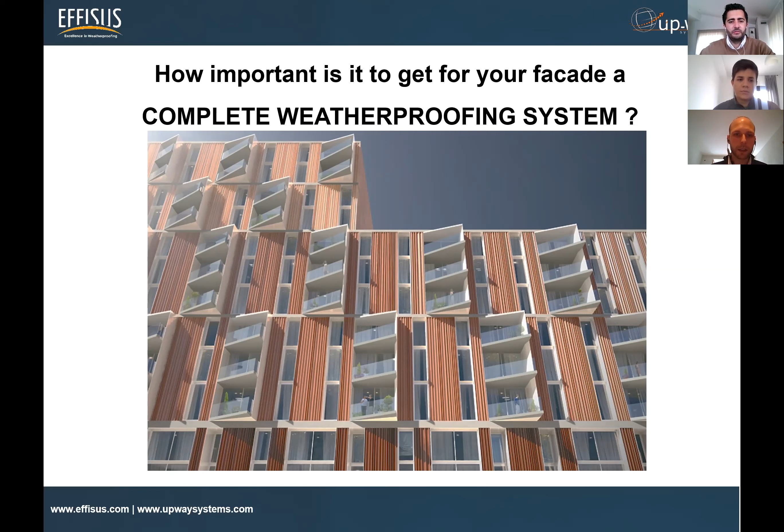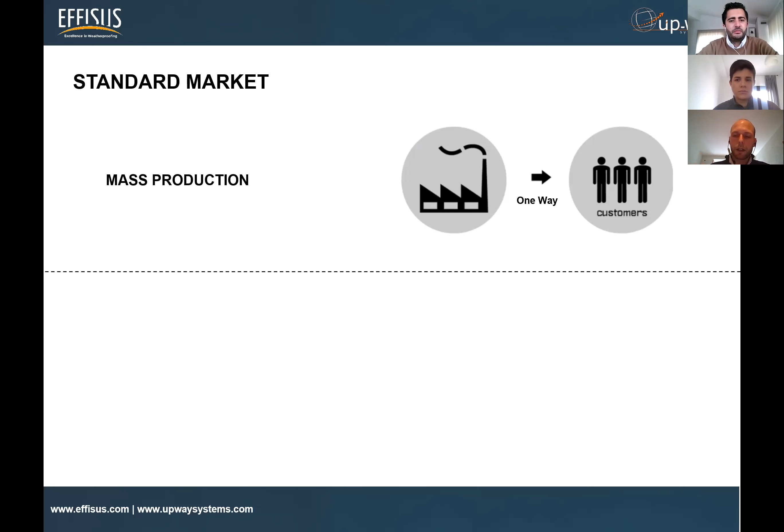Just for you to understand how we approach the market at Effisus. This is what we call a standard market approach: the customers let the factory know what they need, and the factory just produces according to those requirements, in a one-way dialogue. We understand that the best way to achieve a solution adapted to the needs is to make this interactive, so it's not only getting information from one side, it's exchanging this information between all the parties involved.

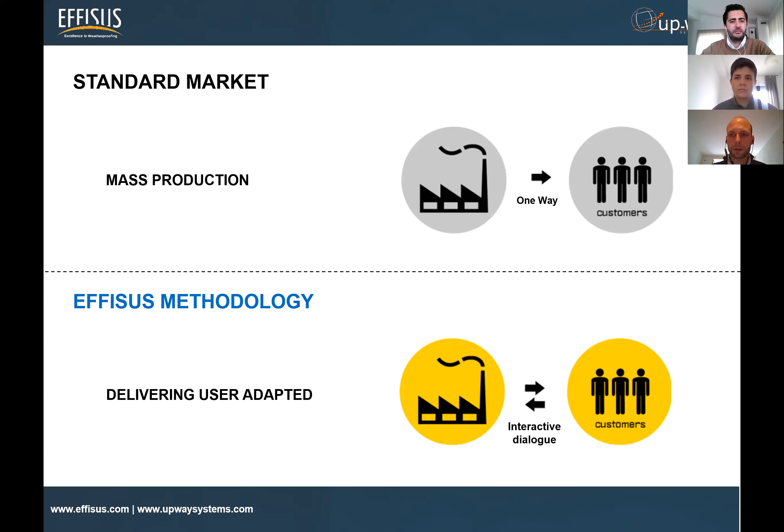So we receive information, but we also discuss it with the client, and that's why we have this approach very close to the client, with meetings at the office, etc. So to close this overview about the company, we have this interactive behavior. We are in contact with several players in the facade industry: facade contractors, consultants, architects, insurance companies, all the players that we believe influence the market, and we are glad to be part of that.

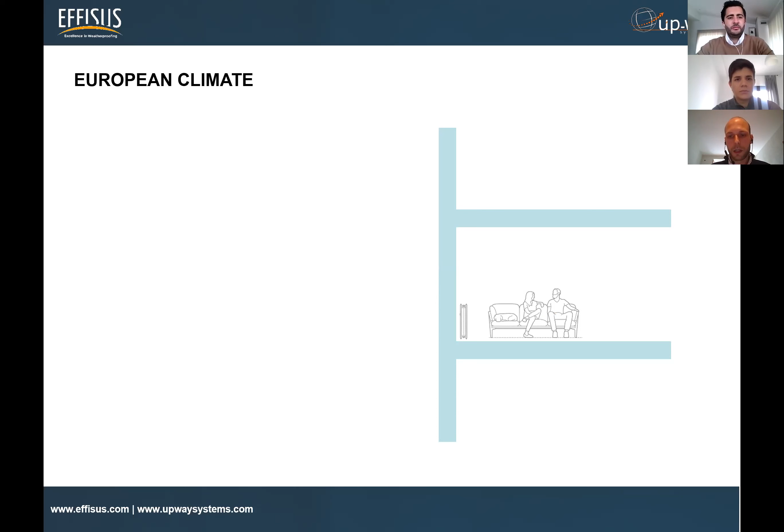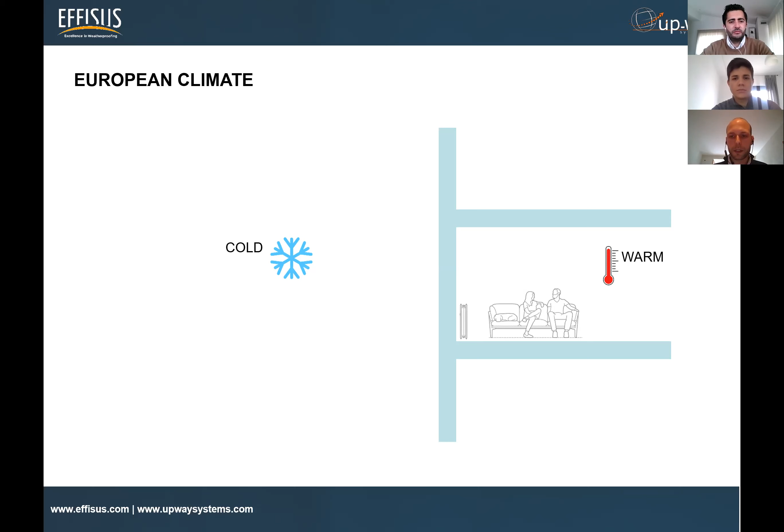So just as background for this presentation, I'll be focusing on the European climate, because when we are designing a facade there are several things we need to take into account, but of course we are able to design and study for every climate. So what do we have in the European climate? Normally cold outside and warm inside. We heat the inside and we transpire, etc. We also have rain on the outside that we need to keep outside the facade.

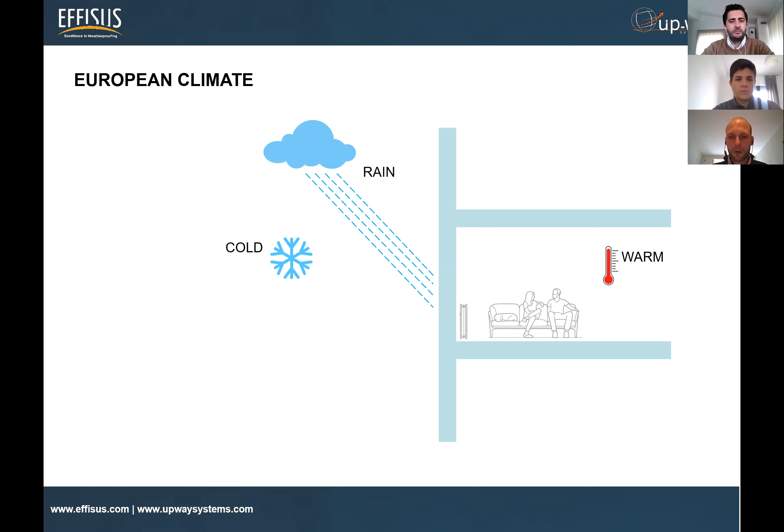It cannot be ventilated, so it will create mold and other issues that will compromise the thermal insulation behavior. You know that wet thermal insulation is not insulation that performs well. So we really can't have it like this.

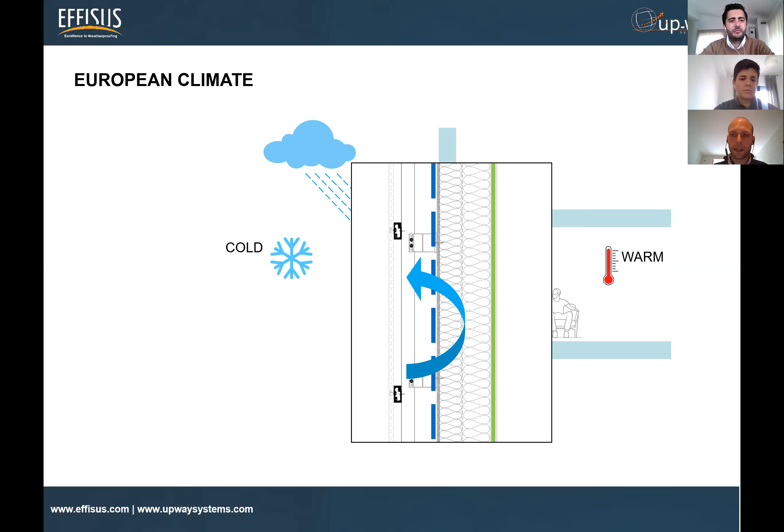Here we have some examples of, I would say, extremely common faults, common problems. Miguel, if you don't mind, I would like to ask you to comment on a few pictures here. I have two slides to show.

Sure, Enric, thank you. Basically, we are so close to the clients, and we see a lot at site - we see a lot of problems. When this facade composition is not well designed, or it's not well applied at site, we see problems. In general, the membranes are quite okay - in the UK market, in Europe, membranes have been applied for the last 20 years - but we see problems.

We see problems on details, on design faults. There are a lot of issues because it's not only a membrane - it's a membrane with accessories, with a lot of substrates, a lot of compatibilities. So it looks quite simple when we are putting a line on a drawing, but at site we see a lot of problems. We see adhesion problems, we see materials applied not for the main application.

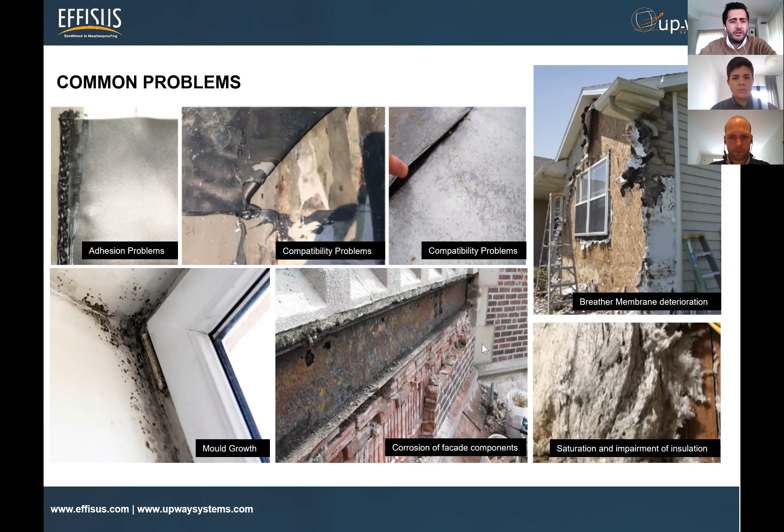So we see breather membranes completely in the wrong place, and in the end we see mold grow. We see insulation really deteriorated, and then it will compromise the facade efficiency, the insulation. We see that a lot - workmanship issues, details. So in general, details. I believe that today we will try to show you what the problems are, as well as what the solutions could be.

Here I could explain - there are some sheathing boards, we have scaffolding penetrations, sometimes the sheathing boards without sealing, and then in the end it's a nightmare - you could imagine easily what the consequences could be. There's a lack of support and a lack of knowledge about the problems at site.

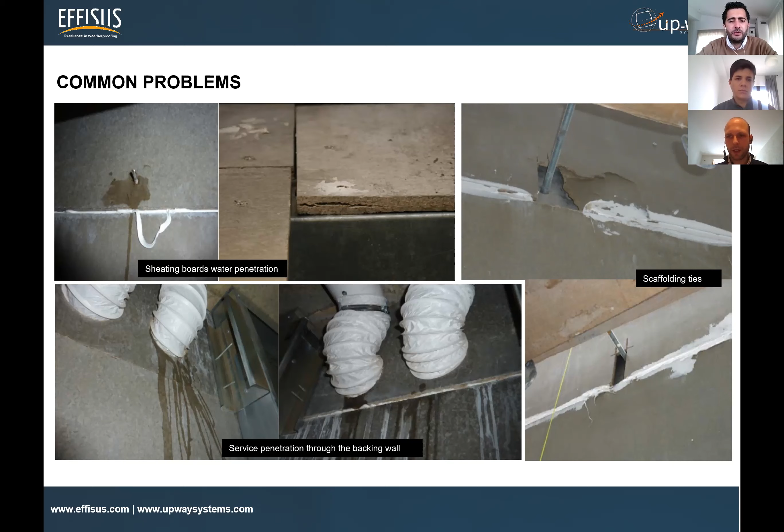Okay, thank you very much, Miguel, for sharing this with us. Now, so we have the climate, we have the common problems, but what can we do to avoid these problems?

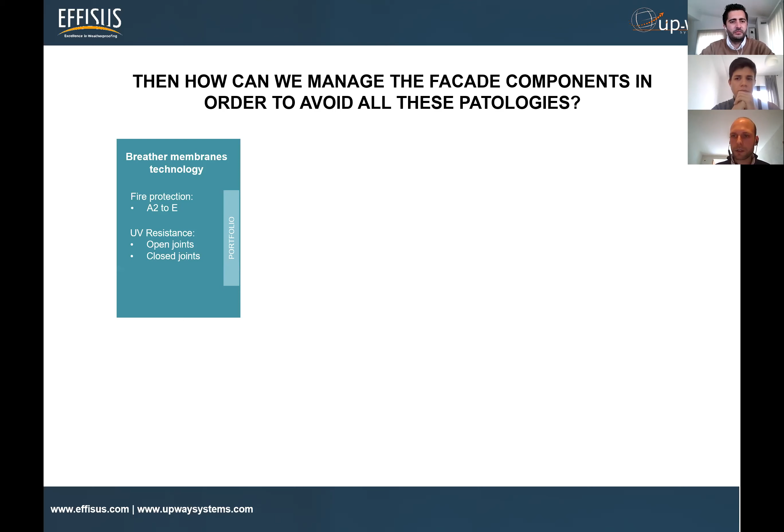I will go across the main segments in our company that we focus on and develop, where we have the most advanced technology at your service. First, I'd like to focus on breather technology, which is the outer layer, as we were seeing in the previous slide. Then we have vapor technology also available, and inside each division we have different options, each best serving a specific need or requirement. So the most important thing to share is that we have different knowledge and different technology available, and we can use it to get the project the solution.

Not the best - there's not a best of the best, that's the best for the project. So we'll look into the project and find the best solution. So again: breather, vapor, EPDM, interfaces.

We previously looked in a simple way at the facade with an outer and inner layer, but we know that many times the problem is still on the interfaces. We cannot say we have a full weatherproofing system if we're only looking at the breathable membrane and the VCL membrane. We need this coordinated between them and between the windows, the roofing, and all the different materials. Sometimes we have projects where we play with rainscreen and curtain wall, and we need these transitions well done.

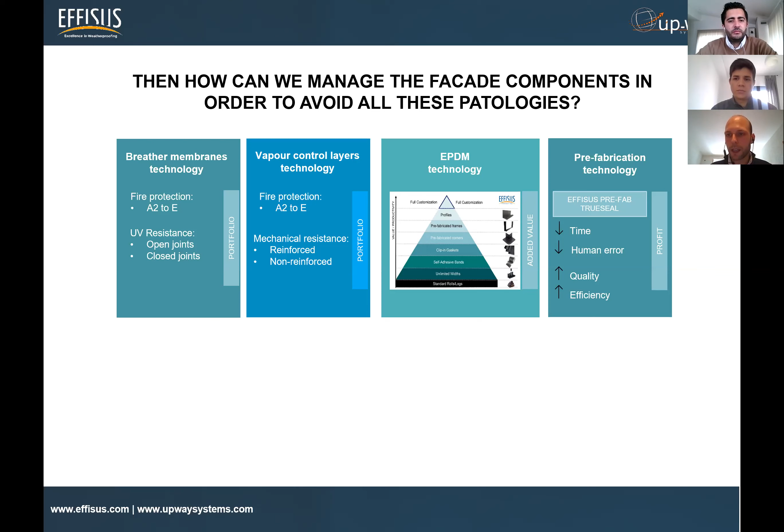We have this technology available to look into the details and get the best solution. We can also add to these three this prefabrication technology, where we take advantage of this previous technology and produce bespoke solutions made specifically for the project, for the needs. Most importantly, we'll save time and reduce human error, because you have a solution performed for that specific issue, and you'll improve quality, efficiency of the facade and of the whole building.

So these four divisions are supported by our consulting department, and as I already said, we are available and try to be as present as we can in order to get all the details we need to advise and recommend the best solution for your facade and your project.

João, I will help you - I will just ask for your help managing the chat, because I'm having some difficulties. If you find some questions, please let me know.

We have one question here from Ben, asking if we have certification for these membranes, and if we can also provide EPDM membranes. Yes, Ben, we have certification for all our membranes, including breather and VCL, and we're also able to provide EPDM membranes - I'll talk about this later in the presentation. We can pretty much do everything with EPDMs.

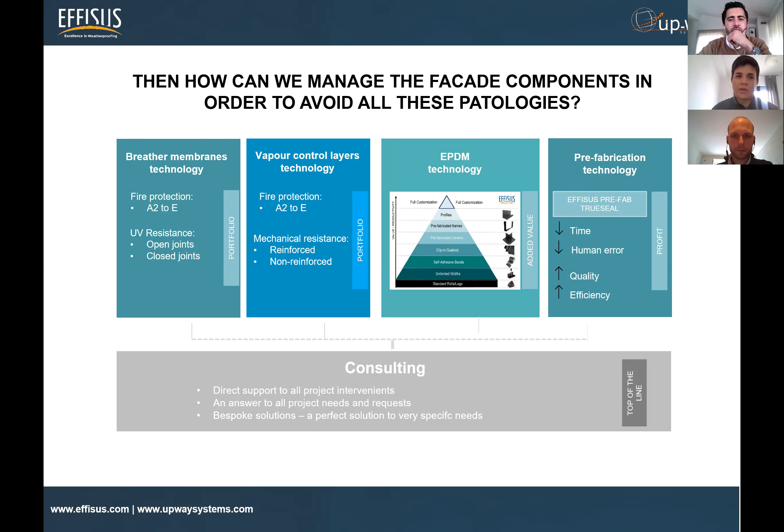Thank you, João. I'll ask you to manage the chat if you don't mind, because I'm finding some difficulties here. Okay, sure.

So within the system that we can provide to the market for rainscreen cladding facade, in a simple way, we have the things we spoke of before in this 3D model: the breather outside the insulation layer, then the VCL on the inside, as already said, and Effisus ECOFACADE for the interfaces between the windows, the roofing, and the breathable membrane.

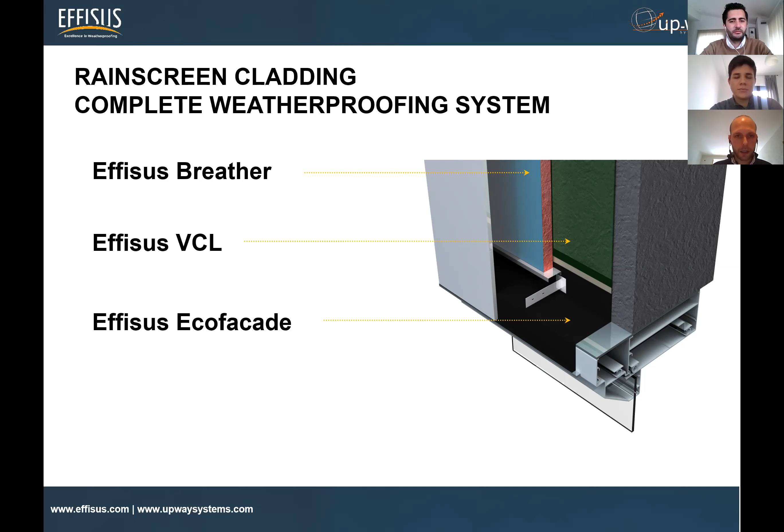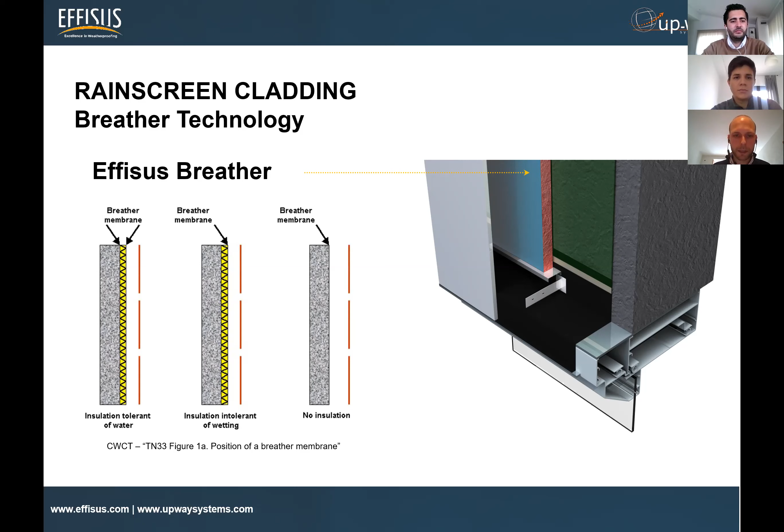So we'll first go into the breathable technology and the breathable membrane. I've put in an image taken from the CWCT manual, but it's more - this is an open discussion. There's not a right way to do things in all projects, there's a common query. We need to look into each project and understand where's the correct place to locate a breathable membrane. Here from the CWCT we have different options and possibilities of placing the membrane. We're looking at the performance intended, or the things we need to care about when talking about the breathable membrane.

Miguel, if you don't mind, just share some topics here, as Enrique was showing on the scheme at the beginning of the presentation. I believe you know the main product features, but I'll try to pick up the main points. It's a membrane whose main function is protecting the interior of the facade against driving rain and moisture.

So we protect, ensuring that we'll not have addition of water or a leak on a facade, or on the top of the roofing that will have a poor intersection. So we ensure that we have a skin all around the facade scheme, all around the facade composition, protecting the full building.

This membrane protects the facade against moisture and even wind. Sometimes we have rain screen cladding with open joints where we have wind, and wind brings pressure, and pressure with water. These membranes ensure we don't have water inside the insulation. It also depends on the facade and the rain screen typology - we might have a membrane with UV resistance or one that could take more UV light than others. So breathers, in general, protect the insulation from rain, moisture, and wind.

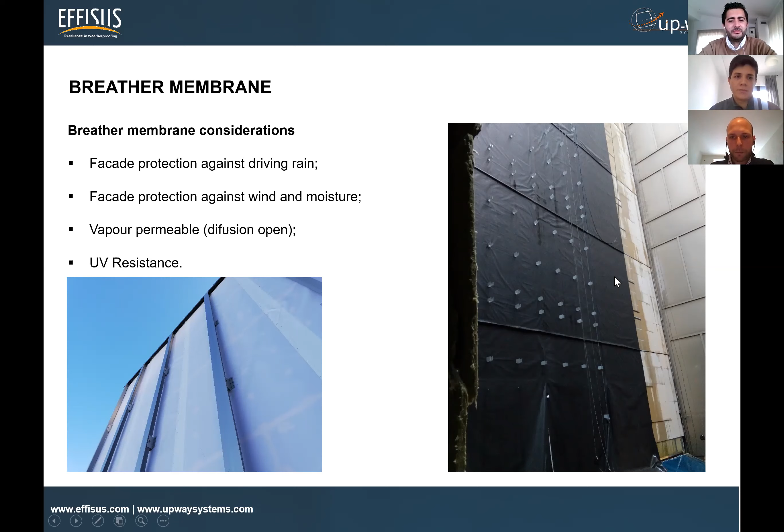Thank you, João. So if you move forward, we'll find here some guidance for understanding what's the best breathable membrane within our portfolio that will best suit your project needs. Here we have five types of breathable membranes available, shown in a simple way with just a few performances or characteristics of the membrane, but others also exist.

Taking also words from Miguel, he was highlighting the need to understand, for instance, if the joints are open or not, if we have direct exposure to UV or not. We need to understand these details, we need to get these details. Sometimes it seems like it's all the same in every project - that's not the case. Our experience tells us that every project may need a different product, so we really like to go into details and understand this.

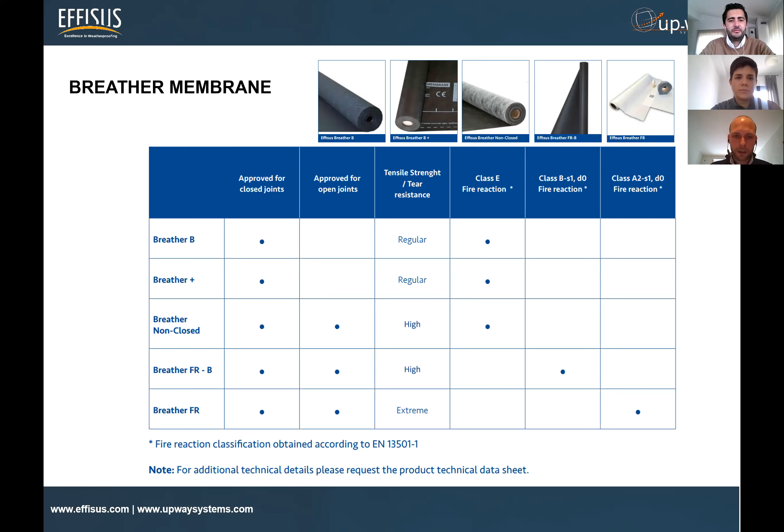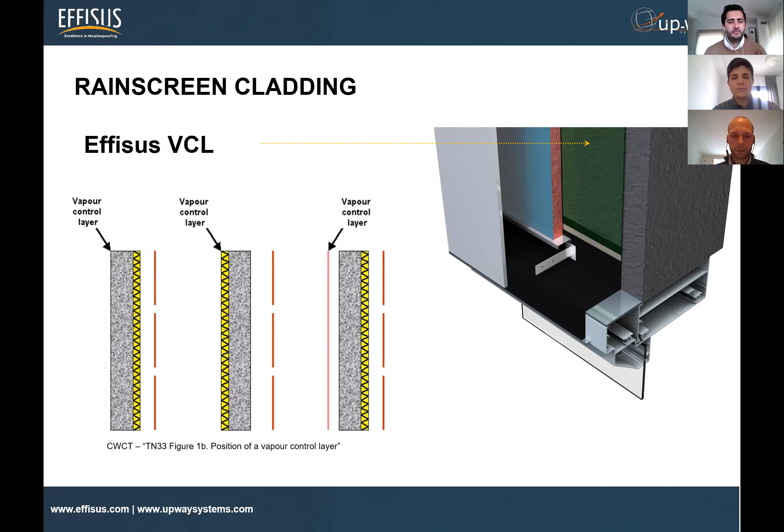Okay, I'll go then to the VCL, and thank you, Joao. Please feel free to interrupt me as we're going to have more queries. So now going to the VCL, again, just some shots from the CWCT manual. Okay, we can also play with the membrane in this position. You know that there are different software also available for these assessments. Miguel, again, as I asked you to. Thank you, Enrique.

Yeah, in the other way, so we have the VCL. Enrique already introduced the characteristics or the features that we need to have. But basically, it's a vapor barrier. So we know well the advantage to have a blocking VCL barrier. So we allow that in one direction we don't have any addition of vapor to the insulation. So again, another important characteristic is the airtightness. So in general, VCL is also airtight, and then we are ensuring the efficiency of the facade. And you know, these are the main features: airtightness and vapor barrier.

And in case there is even a fire, taking into consideration this airtightness, we don't have smoke through all the facade. So if we ensure that we have an airtight facade, we know that we don't have addition of toxicity or even the smoke. So, I'll repeat, it's a vapor barrier, airtightness, and we contribute to have a blocking on the fire and on the toxicity.

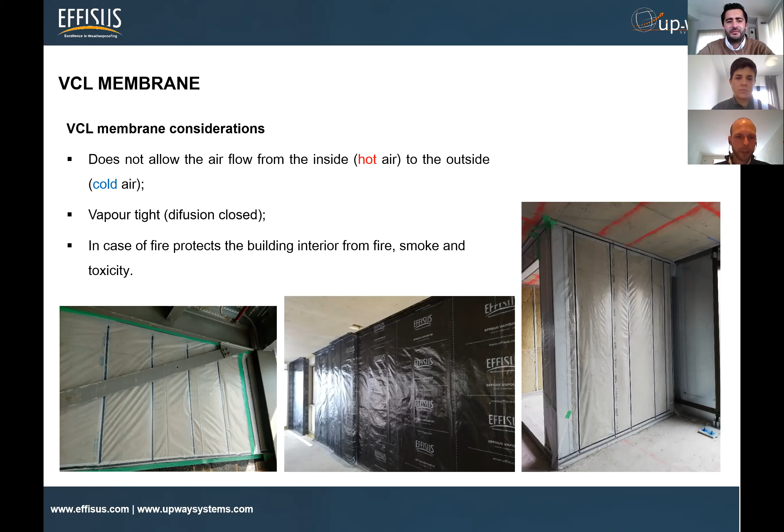Okay, so if we move also to this table, we see that we have different VCL available. And again, we can play with some characteristics. And again, as João already clarified, we have an A2S1D0 VCL system. All tapes, all fixing tapes, all overlapping tapes, all sealing perforation tapes are included in this assessment, in this test, and also paste adhesive. So we have more than one option, for instance, to seal and to fix the membrane.

We can play with these accessories according to the substrate that you have on your project. Sometimes concrete, sometimes metal, sometimes it's another membrane, and sometimes other membranes are involved, and that's another query that maybe we'll have the chance to discuss as well. But it is important to have this system closed and certified as we have, but it is important also to have the chance to play with other elements involved on the facade. So that's the point in this full system.

João, any question? No. So far, no. Yeah, you're right. Okay, thank you very much. But please, people, give us your feedback on this. So if you have any questions, please don't hesitate.

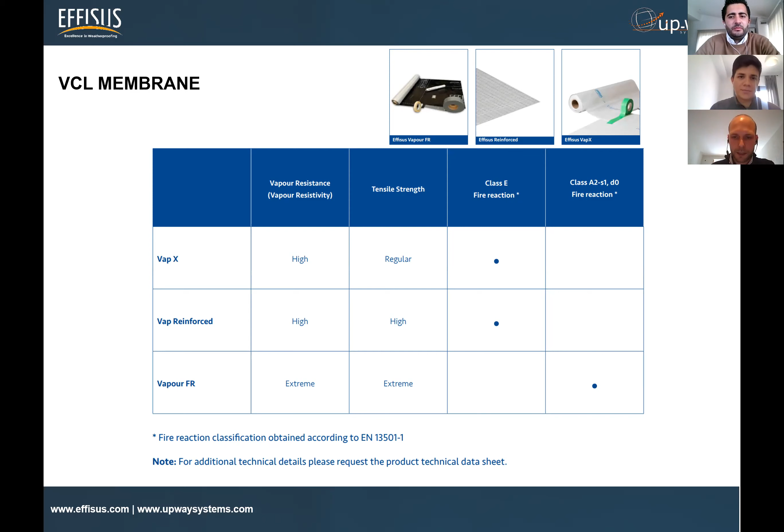So Effisus EcoFacade. It's our membranes for the interfaces. So this is more or less what we can get in terms of EPDMs. Would you like to give us some words on this? Yeah, so picking up the question from Ben again, regarding EPDM, as I mentioned, we're able to do everything. So start with standard rolls, different widths, different dimensions, and we can go to unlimited widths. We are also able to include self-adhesive bands, which would help during the application.

This is grade 1, 2, up to 3, depending on the project requirement. We can add as many bands as possible as well on EPDMs. We also do clipping gaskets. We have over 100 registered types of gasket in our portfolio, which you will attach to the window profile. One interesting thing to mention about the clipping gasket is that we have this technology we call hot vulcanization, which allows the gasket to attach to the EPDM with perfect bonding. So it's very strong. It's nothing like the common market, where they just attach it with adhesive or something like that.

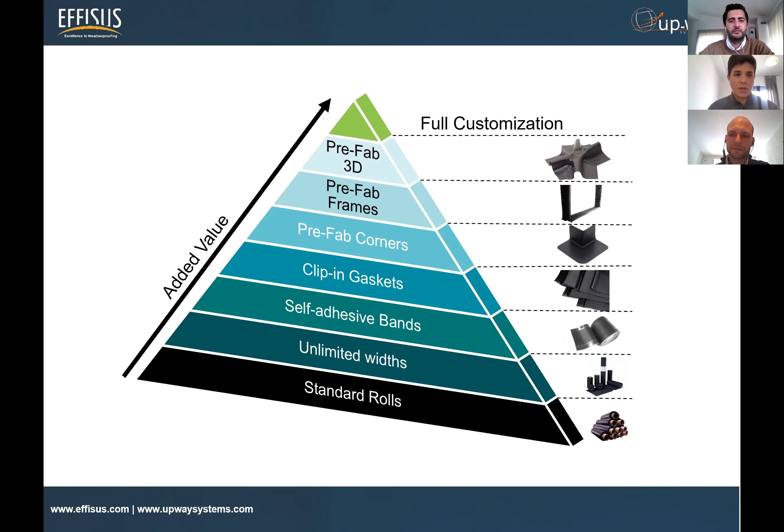It's something else. We're also able to do prefab corners, prefab frames, whole frames for the window, and then 3D types of pieces, which are totally customizable. And yeah, full customization on EPDMs. Yeah, I will take advantage of your last step. So this is really full customization, right, João? Yeah. So here, you see this piece we made for a very well-known project in Madrid. We made this type of X and Y shape piece using EPDMs.

To do this on site, I think we all know it would be a mess. It would be a complete mess because it would be a cut and glue situation, where the guy would have the worst conditions to apply this EPDM and these interfaces. And here, one thing of interest to mention is we pick up this detail at an early stage, we study it, and then we make a mock-up, we go to the site, we test it, and the most important thing is to assure the EPDM will perform.

So the whole purpose of having EPDM in these interfaces: in other situations, when you just have to cut and glue, in the end it will be just like a ball of adhesive. And we don't want that situation. We want it to be very clean and very sleek, so it can perform as an EPDM should. Yeah, as we're seeing in this picture, it seems very clean. So I suppose the adhesive is behind the membrane, so we don't leave it like a mess.

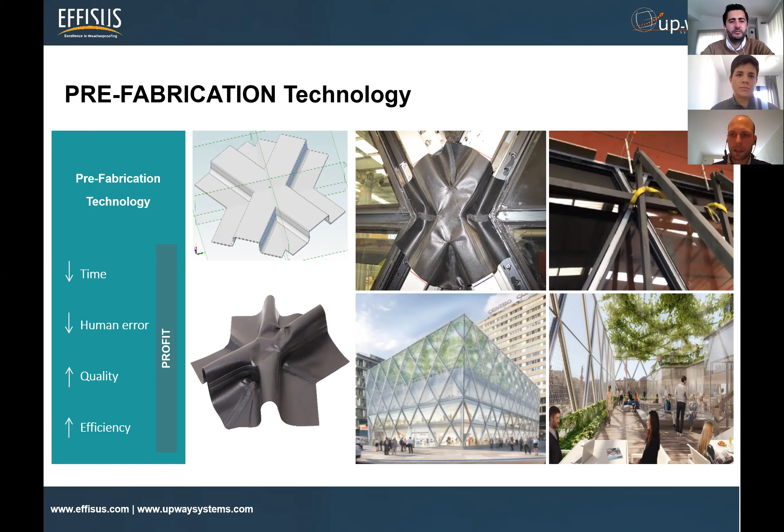And, as João was saying, sometimes you just see a ball of adhesive. You don't even see the membrane. It's hard to see in there because they just covered it with adhesive everywhere, and so it's impossible to guarantee that that specific detail is well performed. Yeah.

So I'll just move forward in here. Let me just read a couple of questions we have here before we move forward. So we have a question from Mar saying, how do we waterproof the membrane penetrations? Do we have a solution for this? As I mentioned, Mar, we have a specific tape for that with the Effisus 2 Bond DS.

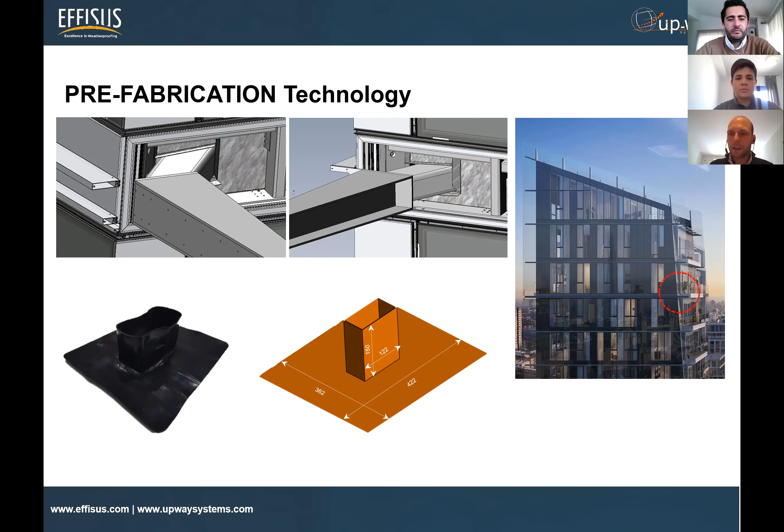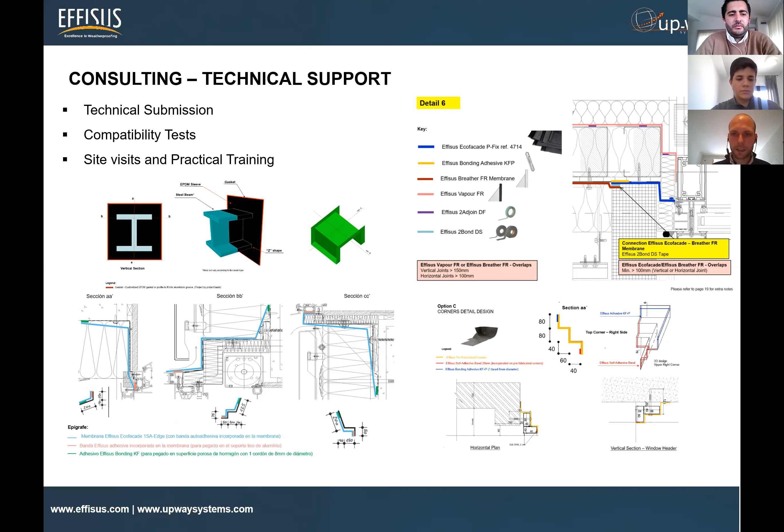Okay, we do like to follow the evolution of the project, and we know that normally maybe this happens at design stage 4. Miguel, more or less stage 4, correct? I think. Yeah. And so we are able to study this from the beginning with you, because when we're dealing, for instance, with bespoke solutions, the more time that you have, the better the solution will be, because we will take into consideration all the requirements of the project. So please don't hesitate in getting us involved in your project.

So again, I'm just sharing this because I found it interesting; you may be interested in getting some ideas on the connection and interfaces between materials. This is one big topic that we are discussing here today. These interfaces between materials are maybe the most important thing when we're playing with one single, full system. You have all these secured.

Sorry to interrupt, Enrique, but here the complexity of accessories and membranes is visible, and we see a lot of products, primers, substrates. So picking up the main subject for today, we see a lot of membranes, accessories and substrates. When we have one single provider or a single design, it allows us to work as a single solution, a single design. So we don't have design faults, or we reduce them. And I think here it shows a lot of complexity in terms of materials and substrates. Correct? Yeah, truly. So again, the importance of having one single system, and being able to manage all this.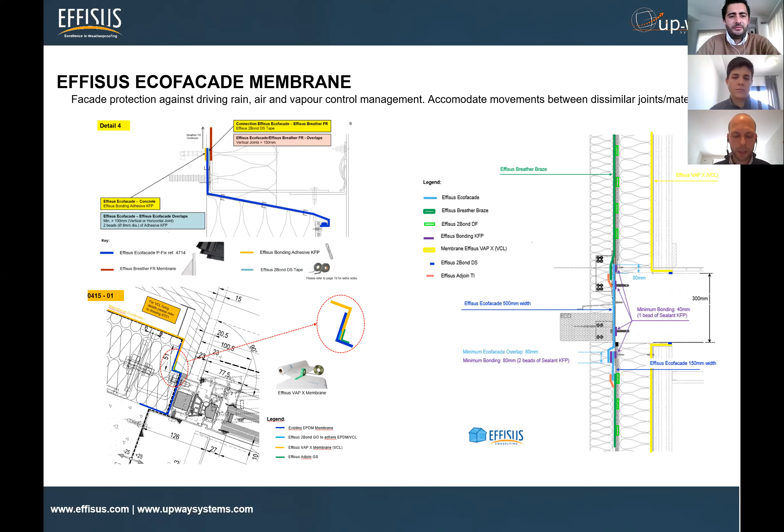So again, more details. It's just to show some compatibility reports that we've done, some supporting documents that we provide to the site. Some details you can see on the small picture on the right. Just next to the green tape, you have the back of the bracket, and you can see that there's a tape between the membrane and the bracket. That's the 2Bond DS tape that we were discussing before.

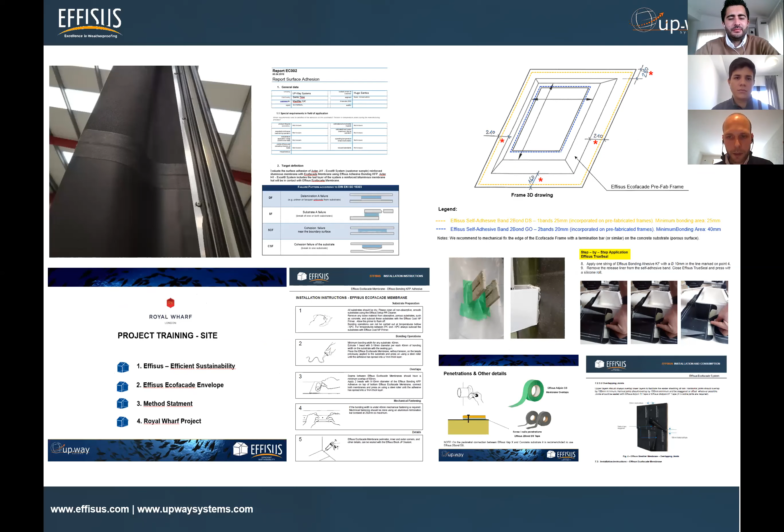And so, going to the main advantages, the main conclusions that we can take from here. If we think about everything that we discussed today, we will be talking about compatibilities. This compatibility problem will be avoided and ensured. You won't have any problem on site trying to connect one membrane to the other. You won't have any problem at the design stage trying to understand if you can play with that membrane and the other membrane. So you are fully covered, with the certainty that it will behave as expected.

And then, one weatherproofing design solution, and of course, the warranty. This is important. You have different warranties from different suppliers. Here we are working as a system. There's no gray zone of who is responsible for which part or which connection. This is one single partner in the weatherproofing solution. And of course, fewer errors at site, improving the facade installation. If you have all covered from the beginning, you'll find yourself at site with a much easier job to perform.